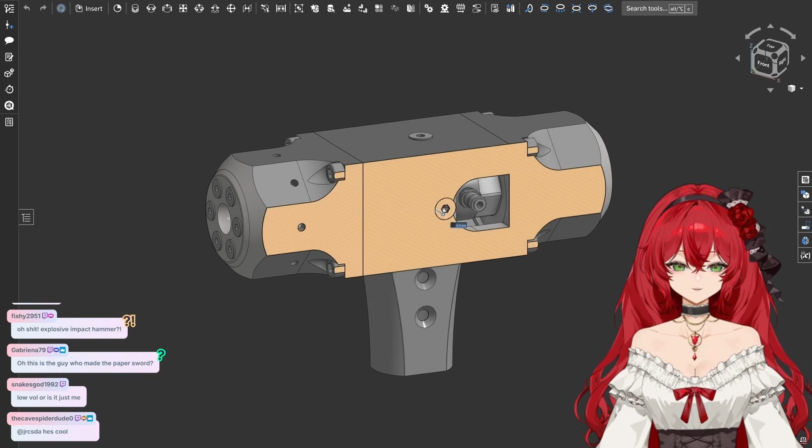Fast forward two weeks of trying a bunch of different things and really getting into it, and now I think I've got something. This hammer basically looks like a normal one, until you open it. The extra power comes from pressurized air and a steel piston that moves forward like a bullet, but never leaves the device, allowing multiple hits with a single refill of air. The problem is that right now this thing is just pixels on a screen. I have no idea how powerful it would be, or even if all these parts will actually fit together.

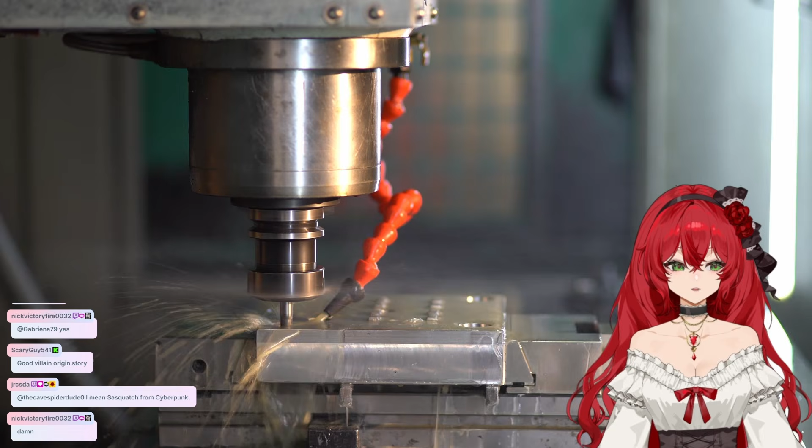So before machining them out of stainless steel, which is a pretty slow and expensive process, to make sure the model actually works, I'm going to build a prototype. To do that, I'm going to 3D print the parts using resin. Full disclosure, Formlabs reached out and I told them I wanted to make an unnecessarily powerful hammer, and they sent me a printer with no strings attached.

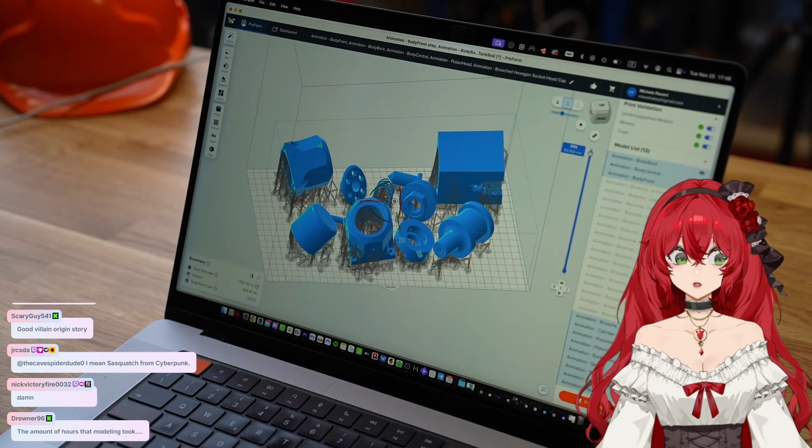But I want to show you how it works because these things are fascinating. Just like a normal 3D printer, you place the parts on a virtual platform and the software figures out the best way to build them layer by layer. But compared to a classic 3D printer, which melts plastic filament to form the layers, in a resin printer the platform moves down into a tank filled with liquid resin. A laser draws each layer into the resin, hardening only the shape you need. Then the platform lifts a little, fresh resin flows under it, and the laser does the next layer, until your whole object comes out of the liquid.

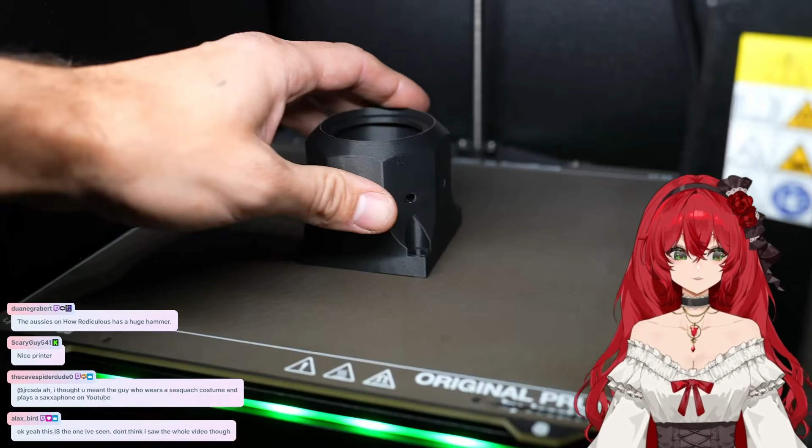Now, unlike a classic 3D printer where the parts are ready right after the print is done, before being able to handle the resin ones I first need to wash them for a few minutes in IPA to remove the excess resin, separate them from the platform to let them dry, and then cure them with heat and UV light to increase their mechanical properties. After removing the supports, I finally got all the components.

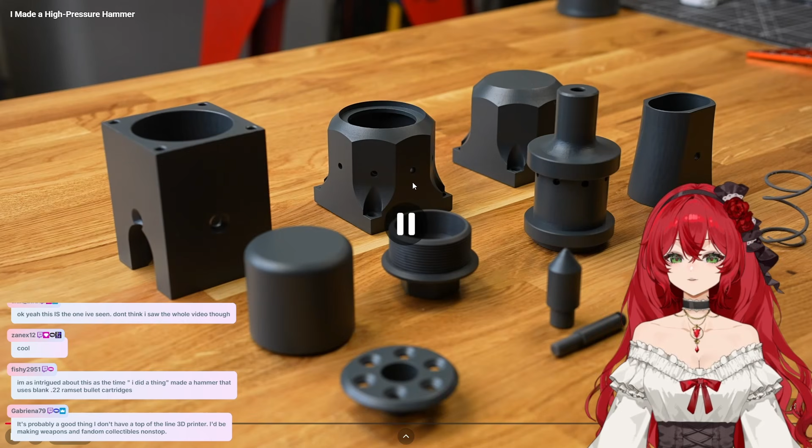Oh yeah, if I had a 3D printer, God, I would go through so much spooling or resin, depending on which one I got. I would go crazy just making the stupidest stuff with my 3D printer.

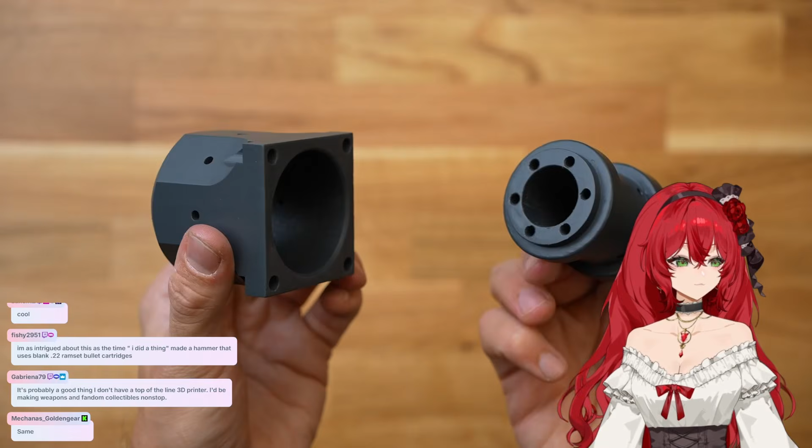The hammer's prototype parts, and they look very nice. Let's see if they all fit together though. So I'm going to explain the function of each component and show you how the hammer works as I assemble it.

Now, the heart of the whole device is this valve. You usually find this inside air guns. On one side it's hooked up to a pressurized air tank, and on the other there's a pin that slides back and forth. In an air rifle, when you pull the trigger, a spring-loaded hammer hits that pin and knocks it inward. That quick tap opens the valve for a split second, letting a burst of high-pressure air rush into the barrel and launch the projectile.

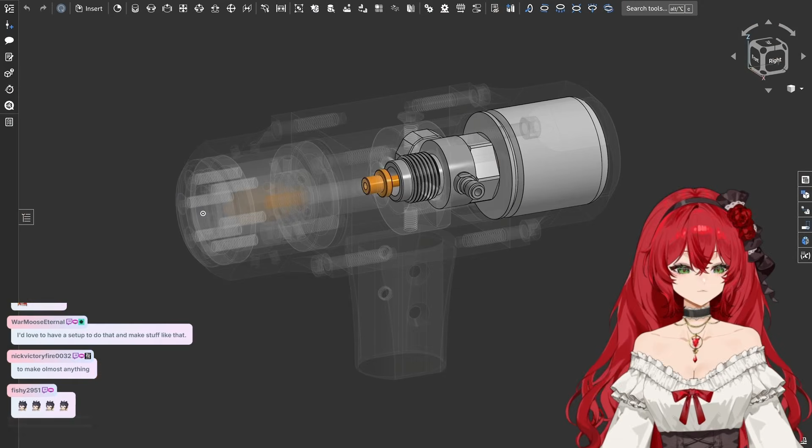And in this hammer, the valve basically does the same thing. On one side, like in an air rifle, it's connected to an air tank. I just couldn't find one that fit inside the hammer and still kept everything symmetrical.

So I'm making a custom one by having two thick steel pieces that screw together. But what makes this device very different from an air rifle is how the valve gets activated.

We know the valve opens when you push this pin inward. And since this is literally a hammer, I figured the smartest way to strike that pin is to use the hammer's impact against the target.

I'm gonna show you how it works without the shell. In front of the valve, there is this sort of cylinder with a central bore. This part goes all the way to the front of the hammer and connects to a plate that slightly sticks out of the chassis. Now, when the hammer hits something, that plate gets pushed inward, and that motion travels through the internal components, making the pin slide, activating the valve, and dumping a burst of pressurized air into the barrel.

Which brings us to the last element of the device, the bolt. Now, this is where this hammer air gun actually becomes more similar to a captive bolt gun, which is the same thing they used in No Country for Old Men.

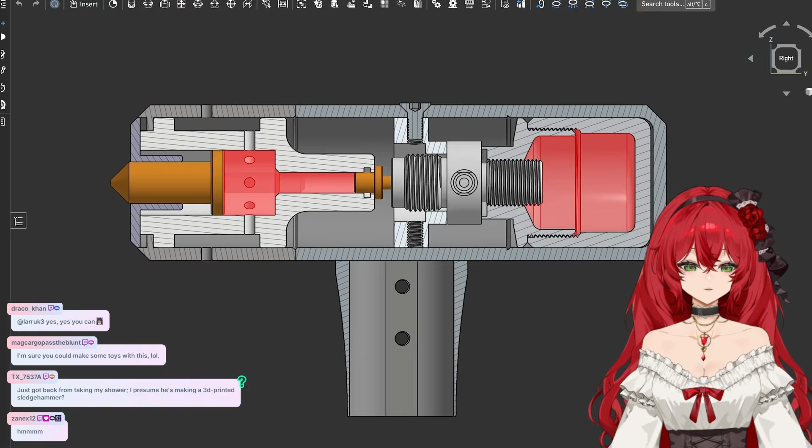When the valve opens, the sudden burst of air launches the bolt forward and shoots it out of the front of the hammer. Now, I have no idea what the final energy will be. Based on some rough calculations, this thing should be fast and hit very hard. Either way, the bolt shoots forward, hits the target, and in doing so, it clears the vents that let the leftover pressure escape from the hammer.

The bolt never actually leaves the hammer though. There is a special set of springs around it that stop it and reset the system. And since after one shot, there's still going to be air inside the tank, the hammer should be immediately ready to fire again.

Okay, what I'm really fascinated with is how he's going to build this small internal tank. That part is so far ahead, like the engineering that's going into the piston, the pressure plate releasing, the piston, funneling the air into the spike. And then you have the spring load on it that resets it. It's interesting. I hope I can see, he said he's going to. I'm hoping we get a better look at the air tank and how he's crafting it to keep the air inside off of the intake valve.

Did he really show it though? Hang on. It's connected to an air tank.

I just couldn't find one that fit inside the hammer and still kept everything symmetrical. So I'm making a custom one by having two thick steel pieces that screw together.

Okay, I thought there was gonna be more to it than that. My mistake.

Immediately ready to fire again. Anyways, the prototype of the hammer is completed. And now, I kinda wanna test it.

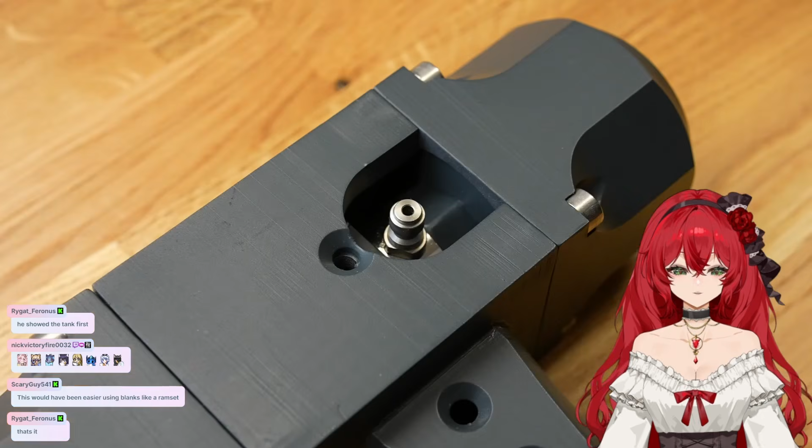Now, using high pressure and plastic parts would probably win me a Darwin Award, so I'm gonna only use a little bit, just to see if the valve actually activates when I push the front plate. I'm also gonna leave the bolt out. I just wanna see if air comes out of the hammer.

Anyways, I tried first filling the tank with a normal compressor, but nothing really happened. So then, I switched to the PCP compressor, pumped for 3 seconds, and once again, nothing. Kinda starting to get worried.

So now, I'm trying to disassemble the hammer to understand what's going on. And without the front shell, it actually worked. So I think I was basically over-tightening the bolts of the front shell. And because of that, I was pushing the pin all the time, so I couldn't fill the tank. But let's see if it works now.

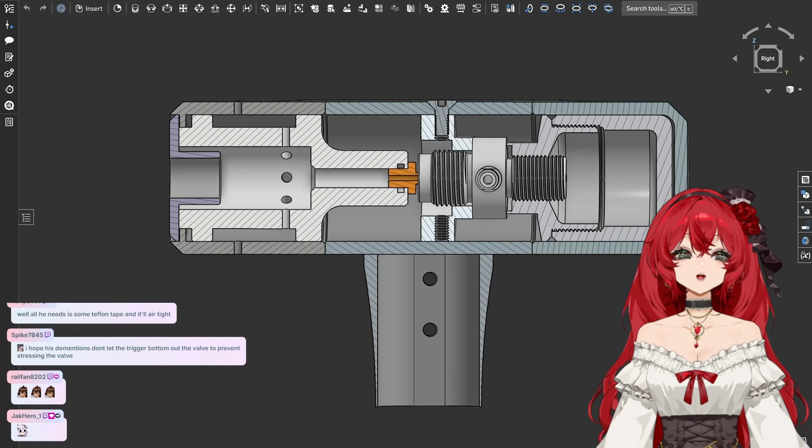Yes! Nice! And yes it does.

At this point, I can finally make the functional version out of steel. The problem is that I do have a CNC machine here, but it's a small one. It's great for aluminum, great for wood and plastic, but it can't really handle harder materials.

But then, something unexpected happened. A guy who follows the channel and lives an hour drive from my house wrote me an email: Hi, I'm a mechanical engineer and I have a big shop with a very cool CNC machine. Do you need help?

Well, I don't know what I'm doing and I'm making a hammer that kind of shoots bullets. Do you wanna help? Sure.

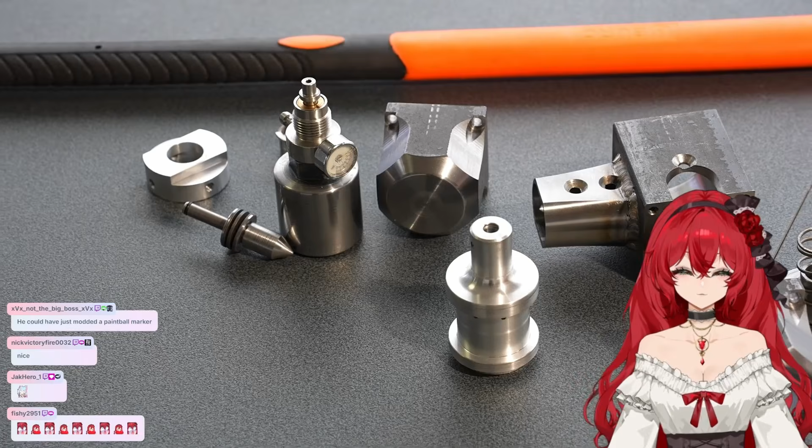This guy's name is Fabio, and he has indeed a very nice shop. With these CNC machines, it only took a few days to have all the final steel parts ready to be assembled. After putting together the components, I officially present to you the bolt hammer.

I'm not sure you can have a crush on a hammer, but I think I have a crush on a hammer. In any case, at this point, I just gotta see if it works.

Okay, Big Boss, it doesn't. He said it fires bullets.

It doesn't. The piston, which is the bolt inside this part of the hammer, is on a spring. So when the pressure plate gets activated, the compressed air will engage just like if you were using an air gun, and the bolt will basically shoot out just past the tip of the hammer for like a second before the spring retracts, puts the bolt back in, and resets it. So it doesn't really shoot out, but it kind of does.

And how powerful it is. To fill the tank, I'm gonna use the PCP compressor. Yeah, right now the tip is set to about.

It's set to about a third of the maximum pressure the tank can take, which is about 4,500 psi. For this first test, I'm also gonna leave the bolt out of the hammer. I just wanna see if by pushing the front plate, the valve actually activates and releases the burst of pressure.

And well, it really does. And that is just a third of the power. The sound it makes echoes through the entire shop.

But not just that, the best part is the capacity. I was expecting to get 4 or 5 shots out of one refill, but in reality I think I got like 20. That means you can smash the hammer at least 20 times before having to refill the tank.

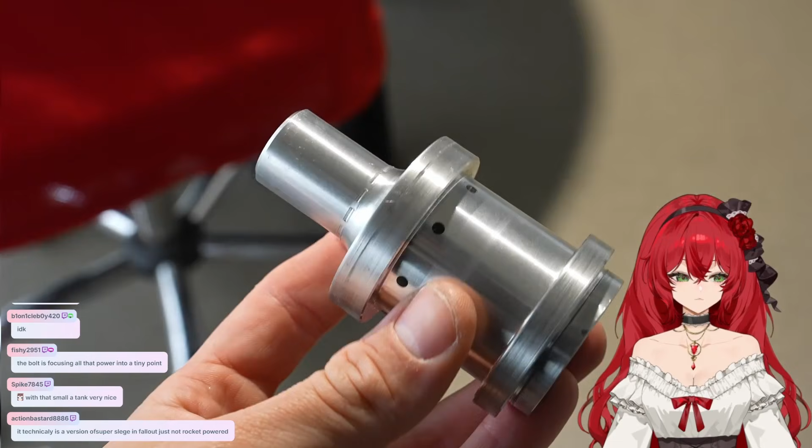So I guess there are 3 possible scenarios here. In the first, the bolt is too weak and it doesn't add any extra damage compared to a normal sledgehammer. In the second, the bolt moves so fast and with so much energy that the springs can't stop it and it would damage the internal components. In the third option, the hammer is very powerful and the springs work.

If this first test goes according to plan, I'm gonna then test the hammer against a few tough targets and compare it to a normal one. So I'm trying first with a low pressure, like 1000 psi.

And the hammer worked. The piston left a few marks into the wood, nice, but nothing crazy so far. The problem is that the pressure inside the tank dropped after just 3 or 4 hits, compared to the 20 from before. So there is definitely something wrong.

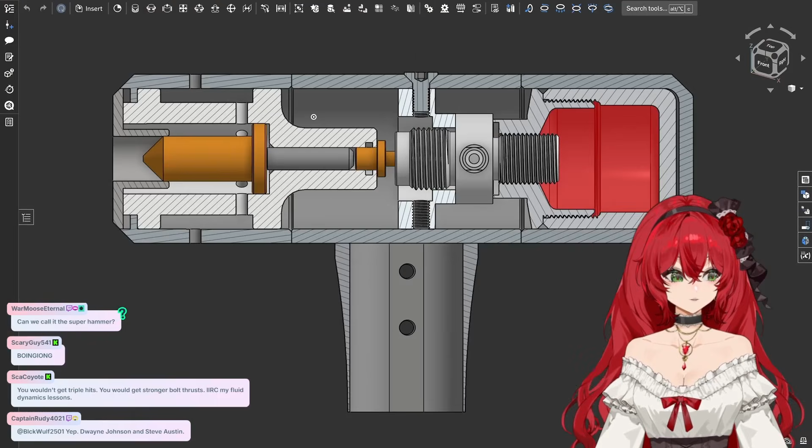So we disassembled the hammer and we found the problem. The O-ring that should wrap around the pin and make sure all the air goes from the valve into the barrel simply wasn't there. So we fixed it.

He forgot it. Engineers, I'm guessing that might be a more common problem than people might think. You just kind of forget the little itty bitty part that makes the thing work.

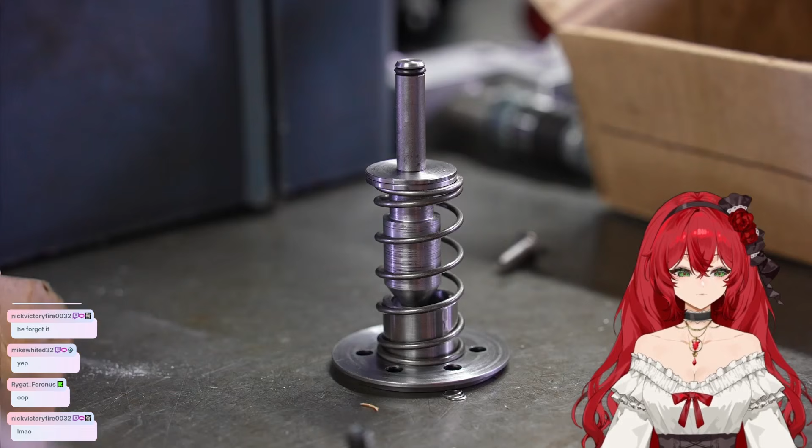We also removed the special springs which were too stiff and only left the normal one. After reassembling the hammer, I'm gonna now try with 2200 psi, which is about half of the maximum power, and very light hits.

Did you see that? A light tap split the thing in half. Hold up, look at this again.

PSI, holy, that's a lot! Half of the maximum power and very light hits.

Dang, I think we're starting to get there. I'm basically splitting concrete bricks in half with one hit every single time. But I still believe by simply changing two things, the power is gonna get way higher.

The first one is obviously increasing the pressure to the limit. You can see when the pressure drops after each hit, the power of the bolt decreases with it. So by doubling the pressure, are we gonna get double the power?

But the other modification... honestly, I don't think so. I could be very wrong here. I think doubling the pressure may not necessarily double the power. It might, however, give it more longevity. That's my suspicion. I think you might get an increase in power of the bolt strike. I don't think it's going to double it, but there's a possibility you may have more longevity in the number of strikes you can get with the hammer before the pressure diminishes.

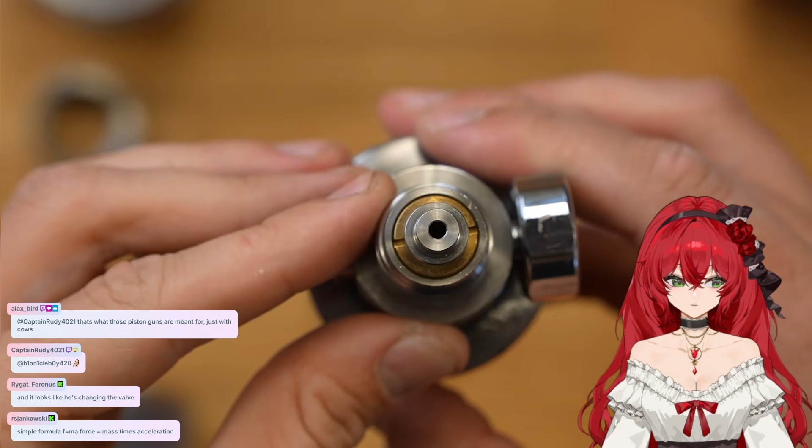The piston - basically, the bigger this hole in the pin of the valve, the higher the amount of air that is gonna push the bolt. So I'm gonna go from this valve to this one.

Okay, I retract my statement. Yeah, we're gonna get a much higher bang on this one. If he's switching out to that valve, okay, I retract my statement entirely. Now we're gonna get a big boom.

This new hole is almost two times larger than the previous one. Also, the gauge on the new valve glows in the dark, which is pretty cool.

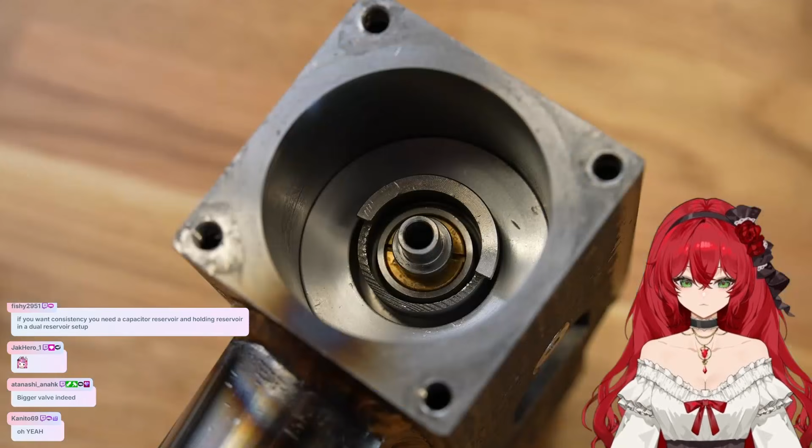Alright, since I'm scared especially by the new valve, before running the full test and comparing this hammer to a normal sledgehammer, I wanna go for one empty shot, without the piston, at 4000 psi. Let's see if we can tell the difference.

This time it took about 5 minutes to fill the tank. But now I'm ready to try it. I'm gonna use this hammer here to activate it. Not sure if it activates. And well, it activates - my ears couldn't stand it. It was light. Let me try to hit it very hard.

Even without the big echoey warehouse, my brain switched to panic mode and I put my headphones on. Holy crap, this definitely works. And because the valve pin hole is bigger, more air comes out of the tank, and you also get fewer shots per refill.

Anyways, after disassembling the hammer and inserting the bolt, I'm now ready for the final test. I've got a few targets here, going from pretty brittle to very tough. I'm gonna hit all of them both with my bolt hammer and a normal sledgehammer, to find out if the bolt actually makes a difference.

So as usual, I'm gonna use an ultra slow motion camera for the test. This way, we're gonna clearly see what's going on when the valve activates and the bolt hits the targets. Alright, after preparing the table, which is basically concrete blocks, I can now start with the first.

Like, he's literally - you guys were mentioning Sasquatch from Cyberpunk, and you're right. This literally feels like a Cyberpunk weapon, like a weapon that would be used by one of the animals in Cyberpunk.

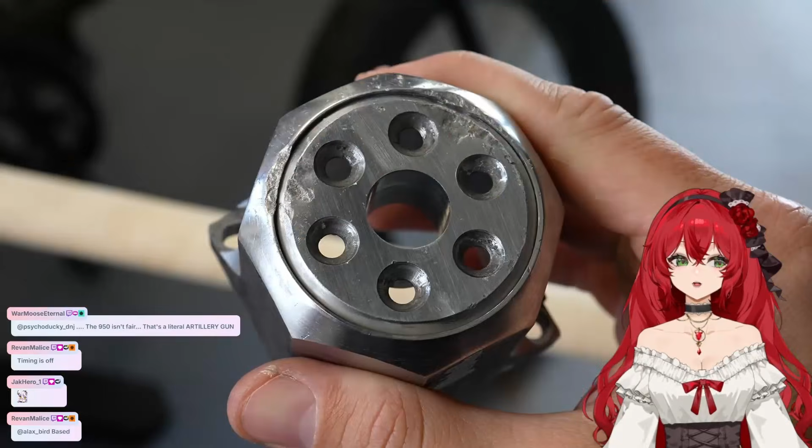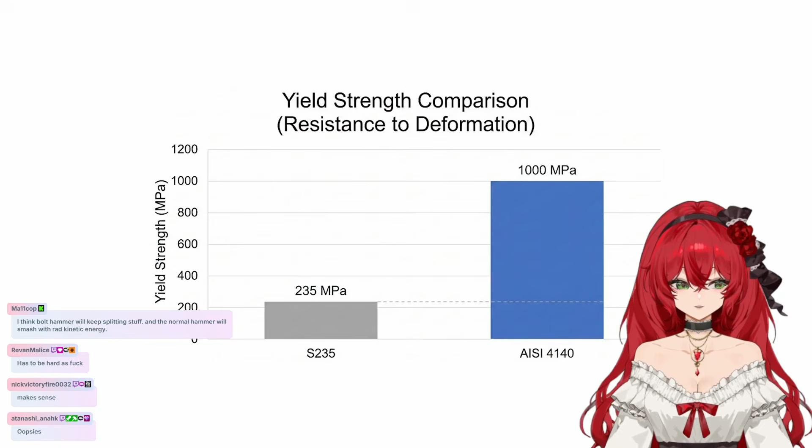I spent months on the project of this hammer, and I literally never, not once, thought about the most important thing for a sledgehammer: the steel. The reason why the hammer didn't split the stone is the same reason why the hammer broke, and that's the kind of steel it's made of. All the components are made of S235, which is literally the worst possible steel you could use for a sledgehammer. Common sledgehammers use a steel that deforms 4 times less than S235.

For a sledgehammer, that makes all the difference. Yes, it does. But even though things didn't go as well as expected, I'm not giving up. I'm already working on a much better version with the toughest possible steel you could use for a sledgehammer, and a brand new design to increase the overall power and avoid damages. I'm placing the order today, so I'm gonna show it to you very soon. Thank you for watching, guys.

We've got to watch that. We have got to watch his redemption arc video. And honestly, the really cool thing about this is it shows you that engineering is trial and error. We thought he had this down, that it was all good to go. And that even engineers can forget some of the most basic things. It's all kind of a learning.

It's proof of, when you're engineering something brand new, you got your proof of concept, you're doing your testing, and even when you think you've got everything just right, sometimes what might seem like the most obvious thing will just slip through the cracks and you won't even think about it. First he forgot to put in the O-ring, and then he realized, I got the wrong steel.